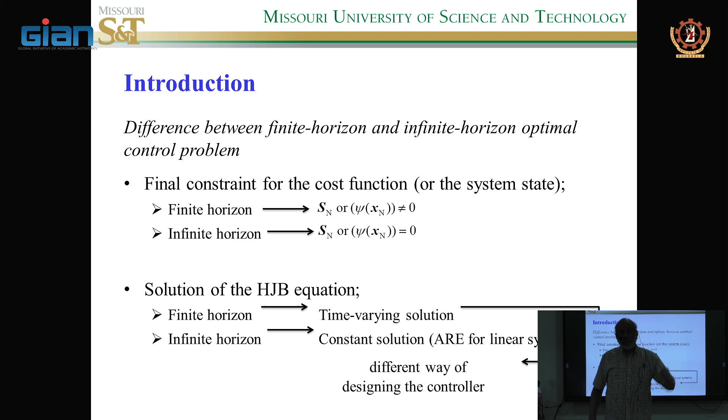Now the only reason we don't deal with this for tracking - I didn't talk about tracking - but the reason we don't deal with that is because in function approximation, when you're using neural networks for instance, you have a problem because you have to have it on a compact set. And so when time is infinity, it doesn't stay on the compact set. So when you have a time-dependent trajectory, typically a trajectory tracking problem is explicitly a function of time. And so there's a lot of discussion - even though simulations work, mathematically it is not correct to have tracking. Here is regulation, but you can do the same thing on tracking.

And if you do that, then you have the time, and therefore neural network approximation mathematically is not correct, although it works pretty good. Whereas for finite horizon, the actual activation functions will be an explicit function of time - I'm going to show you that, don't pay attention to that. And that's okay, because it's finite, since it's finite time, n is finite, okay? So it is okay to have that on a compact set. But for infinite horizon, this is a problem. So normally, there's a way to do it - we take the augmented system approach.

That's also similar to what I presented. Okay, so the solution to the HJB equation, you see that for finite horizon is time varying, and for infinite horizon it becomes a very standard algebraic Riccati equation.

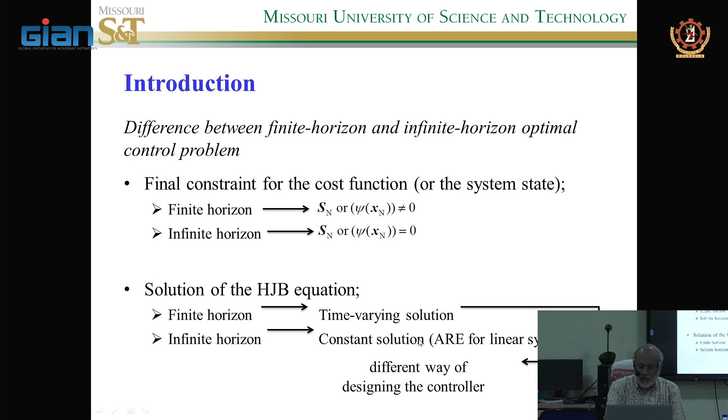So here I'm going to go back again to the LQR problem, the linear quadratic regulator problem, where this is a discrete time system. In this case, A and B are constant. It doesn't matter, A and B can be time varying; you get the same set of equations. So you see that we are defining an index. This term is called terminal constraint. You see that? And S_N is the terminal weighting matrix, which is up to the designer.

You choose that. And here you see the second term, i equal to k to N minus 1, this term is called cost to go. The cost that goes from k to N minus 1. And it is always quadratic. You can pick non-quadratic functions; there are benefits to that. But for you guys right now, we are assuming this is quadratic, okay?

So if it's quadratic, there is a quadratic term in terms of state, and a quadratic term in terms of control input, because you want to minimize the error in the state as well as the control input. That's what you normally try to do, right? So we talked about the derivations earlier. You end up in a Riccati equation because you have to solve for S of k. And that S of k goes in the control policy, and you see that K_k is a function of S of k plus 1, A and B.

So S of k plus 1 comes from the Riccati equation. Now, remember I said the Riccati equation you solve backward in time. Look at that, S of k is a function of S of k plus 1. So that's why you start with S of N. S of N is already given here, that is the terminal constraint. S of N is given, and then you come backwards: S of N minus 1, S of N minus 2, and S of k. That's how you go backwards from the equation.

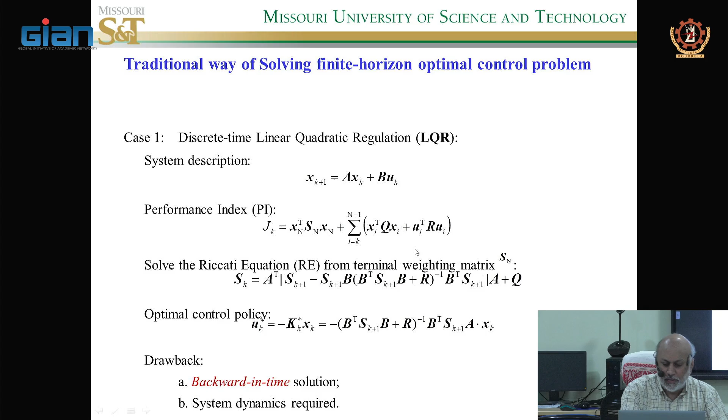And typically there's no closed form solution; for Riccati you may find it under some conditions. So basically it's a challenge, okay? It's a quadratic equation, and you can use numerical methods. But the problem here is it's backward in time, as we talked about. So if it's a nonlinear system, where f and g are nonlinear and smooth, then the same idea.

You have a performance index, and the performance index has a terminal state constraint given by psi, plus this r is the cost to go. And we use a recursive Bellman equation, V star of x_k. You see this V star is an explicit function of k. Remember, this is what I was talking about. Why is it an explicit function of k? Because this is a finite horizon. For finite horizon, the value function becomes an explicit function of time, just like the Kalman gain becomes time varying.

Okay? So now you write this as k to k plus 1 and then k plus 1 to N minus 1. So the optimal control policy not only requires the g dynamics, but partial V star over partial x of k plus 1. Now typically V star is unknown. That's why we use a neural network. And what is that neural network that approximates the value function called? That is called the critic. The critic approximates the cost function.

So there's another neural network we use to approximate the control input because you don't have g. And that neural network is called what? Actor, because it generates an action, which is a control policy. Okay? So you cannot forget that.

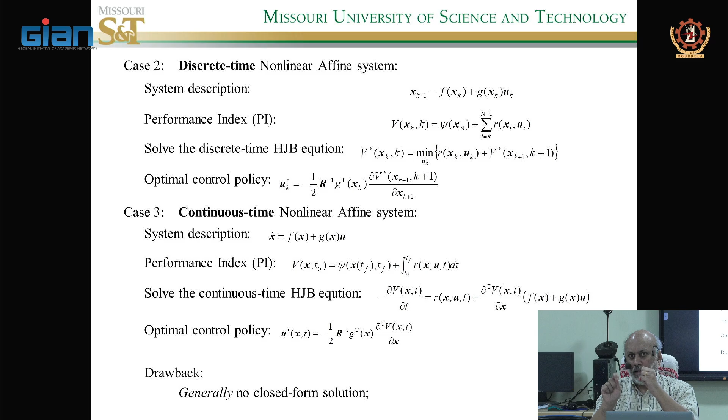So what they do, remember I said, between any sampling interval you hold the time, and then you use numerical methods to solve that HJB equation. Okay? And again, how many iterations you need is also not known. You see what I'm saying?

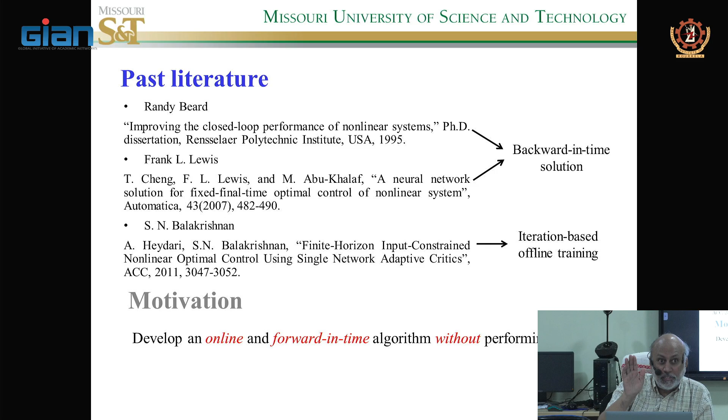So that's the problem, you need to remember that. And there are some references, I talked about it. But the goal was online and forward in time. I think that was the goal. Because otherwise we cannot implement backward in time optimal control in any of the applications, even if you know the system dynamics.

So this is the same thing that we talked about in discrete time earlier, I showed you. So the Q-learning essentially relaxes that problem. Two things it relaxes. One is the backward in time, and what is the other thing it relaxes? A and B, that is correct. You don't require A and B. So you cannot forget that. This is with or without the network.

Remember that. We do this and then we are applying the same idea. So it's no big deal once you understand this. Remember, that's why I'm going through it, because we're going to talk about the quantization at 11 o'clock. So I want you to understand this reinforcement learning stuff. And I'll also show you some history stuff.

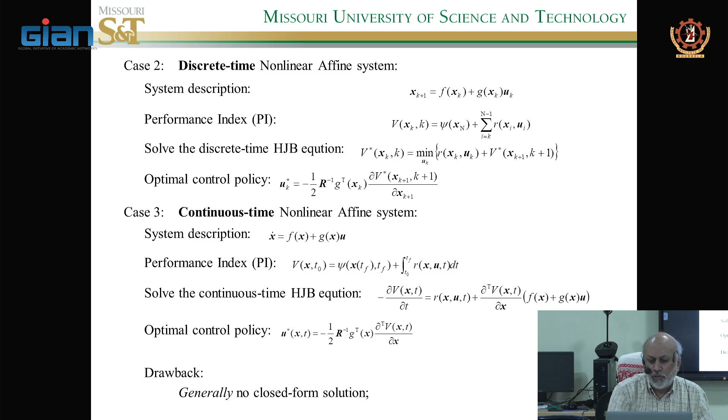So the way it works is you define J of k plus 1 is equal to this. You remember that the Bellman equation is a recursive equation. So you use this equation, this V star of x of k plus 1. The V star of x of k plus 1 is basically the J star of k plus 1, which comes out here. See that? So it's very critical. In some slides I have the details. So you see this part is basically that.

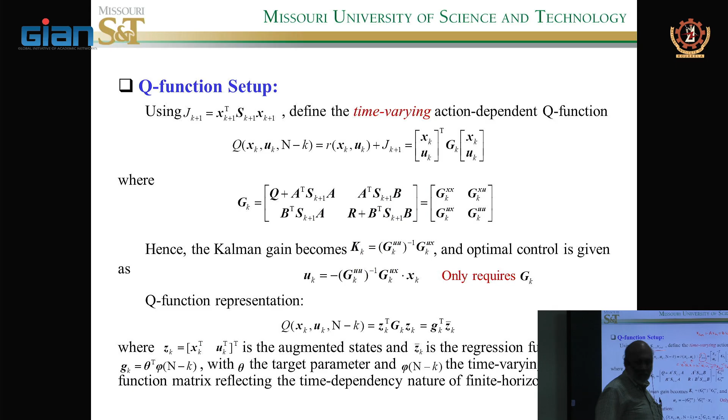So this equation becomes x Q x plus u R u, plus x of k plus 1 transpose S of k plus 1 times x of k plus 1. So now what is x of k plus 1? It is equal to A times x of k plus B times u of k, from the system dynamics. Right? That's what we did here. Oh, I think it doesn't change here.

So what you do is, wherever there is x of k plus 1 transpose, you put A times x of k plus B times u of k transpose times S of k plus 1 multiplied by A times x of k plus B times u of k. Now you see that there are terms with x of k and u of k. So you combine that and write it in the form of xk, uk, you pull it out, and then you have a matrix. This matrix is G of k, and then you have x of k, u of k. And that's how we got that matrix. It's not difficult at all.

Any questions here? Because we keep using that if it's a linear system, linear networked control systems and so forth. It's not that hard. So once you have it, now look at that. You really need this term. We don't need this whole matrix, but you need that term. Inverse of that, multiply by that. And that's nothing but your K of k, your gain.

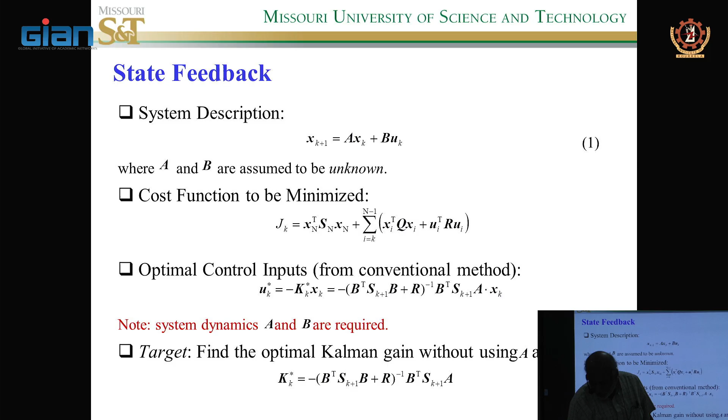Okay? And that becomes an adaptive control problem. All right? Okay. So here is the inverse. Remember I said, here is the inverse times that. Okay? All right. So that's for linear systems. So that's called Q learning. So Q learning, you relax A and B, and it does work. Okay. So let's see here.

Now, professor asked me the history, right? I'm going to show you this. So here, now you see this history stuff. So what you do, you have this N minus k minus 1, and you get that in the basis function, and you get this. So now look at that, the Bellman error, this is what I want to show you, is given by this expression Q hat at k plus 1.

So this term is the difference in the time with the cost to go. So therefore the error in reinforcement learning. So this is where you use adaptive dynamic programming. So that is where you're bringing in the adaptive dynamic programming, which is the reinforcement learning concepts, into this. Okay? Now look at that. There is also a terminal constraint error because it's a finite horizon.

Now look at the update law. This update law basically tries to solve it by minimizing the square of the Bellman error and the terminal constraint error. Okay? So now this is where the professor was asking. Look at that. You see this? That's the history.

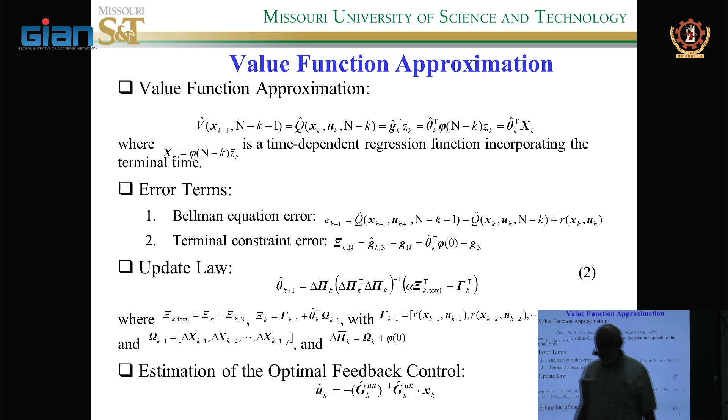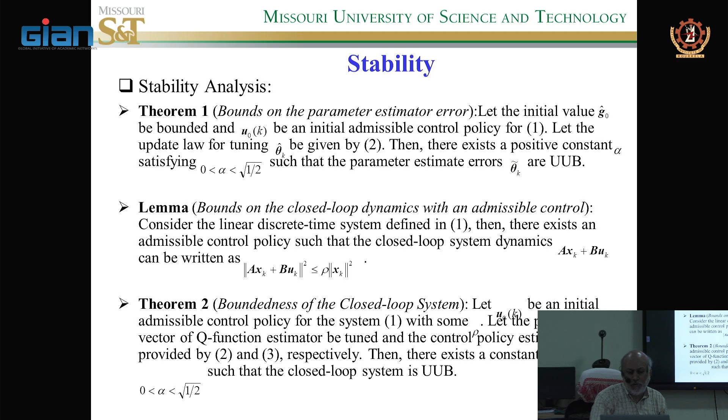Any questions, guys, here? So this is the idea for linear and nonlinear systems, and so here are the proofs that normally we talk about. Okay, I didn't go through it, but you guys can go through it. And we talked about the output feedback as well last time.

Okay, so now remember those update laws here, the adaptive observer, those are developed as part of the PhD work. And remember I said, how do we derive those? Using Lyapunov. Most of the students that work with me spend probably 9 months out of the 12 months doing that, and 1 month just getting the results, and 1 month basically coming up with a solution. So most of the time we spend is on the proof, and that takes an enormous amount of time.

Now, is there any better way? No. For all people who are doing research, the main challenge is in the mathematical equations. That's why I told you simulations work, but we want to ensure that theoretically there is a guarantee. Otherwise, in control theory, you can't publish a paper. Okay, any questions, guys?

So now, in the update laws, you see, the update laws are driven by the Bellman error. See, this is the output error for the observer. This is the Bellman error. So that's what the Bellman error is, the measured quantity. So we are using that to drive the update law. It's used to tune, and you learn the G hat, and over time the G hat will be pushed to G. And when it gets pushed, the Bellman error keeps going down to 0. Remember, that's what those plots are.

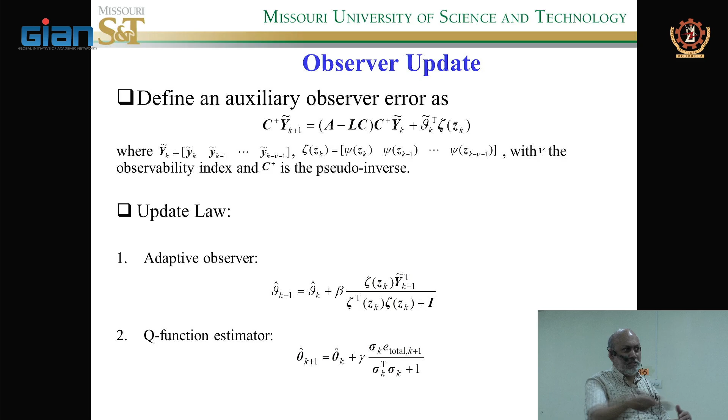Okay, so I'm just saying that a lot of times students don't realize it, because nobody tells us at that time. But when you're doing PhD or MTech, you guys get paid less, or some of you probably not, I don't know, GATE usually pays some money, right? But how much do they pay in GATE? 9,000? Huh? 12,400. That's not much, right? A BTech guy who gets a job is making more. But that's only temporary for 2 years, remember that. That's what I'm trying to tell you.

The same thing when somebody is doing PhD, the MTech person would be making more, right? But that's only temporary. But the minute you get onto it, you will be far ahead. You will be far ahead of the person who just goes with the bachelor's. Okay?

Yeah. But remember, while what I'm saying is true, PhD is not for everyone. Don't forget that. In other words, you don't want to join a PhD if you don't have the inclination to work hard. And you'll probably have sleepless nights many times because things don't work in the mathematics. Remember I told you that things won't work. And that's why I said, out of 12 months, 9 months we spend on the mathematics because it doesn't always work, until you get up in the night and you find an answer. Okay? So that's where it's no pain, no gain.

This has nothing to do with machine learning, but right now pretty much every company is expecting machine learning. Whatever I talk to you, the temporal difference error, all that is machine learning. We are applying this for control. And you see that data, I kind of skipped. All that comes in as part of that, how much data you pick, what type of data. I just told you, you use the temporal difference error, but that's how you select that.

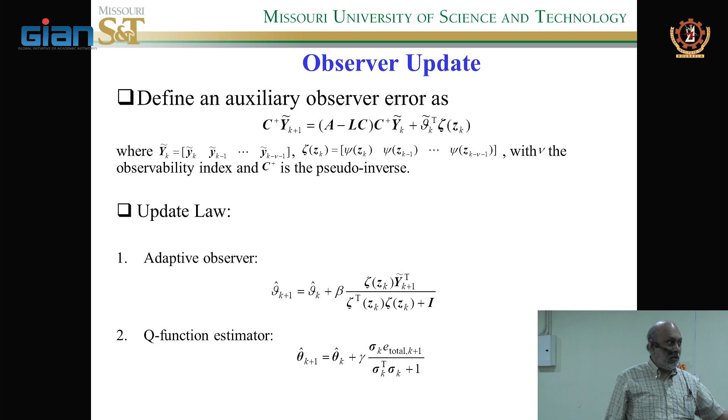Learn how to do a little coding, not just MATLAB, C code or C++ or Python. Now Python is wide, so many know Python. Most of you know it, there's only one hand that doesn't. Learn Python. Any other questions, guys? This is my 5-minute advice. This is fact, there's no bullshit in here.

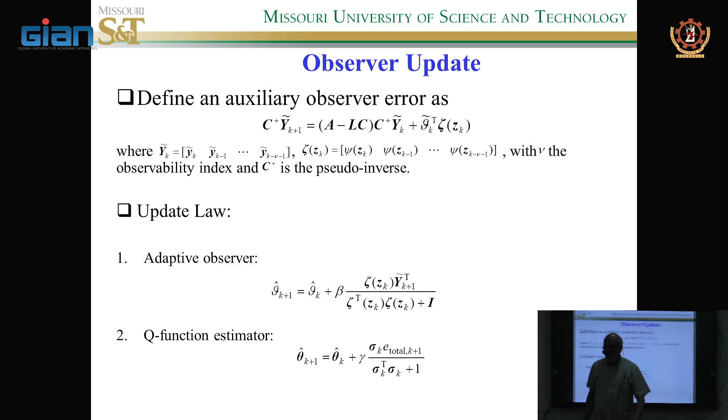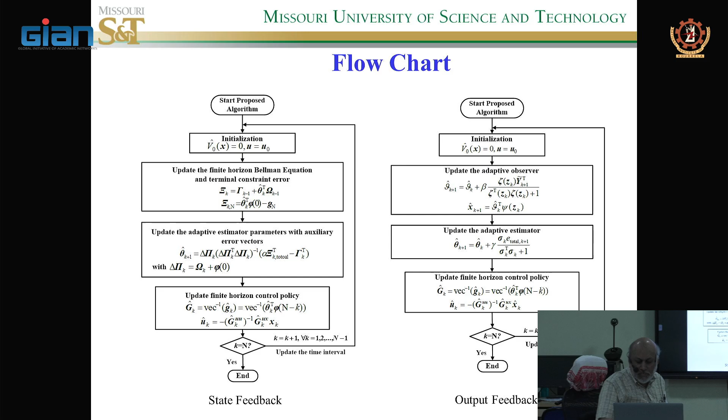Let's go back. So observer updates, we looked at it, and there are two flow charts with the same idea. This is the state feedback, this is the output feedback. We do the same thing for nonlinear systems, and I showed you all that, so I'm going to skip here. Any questions here, guys? This is what we covered yesterday, so I just went through it quickly.

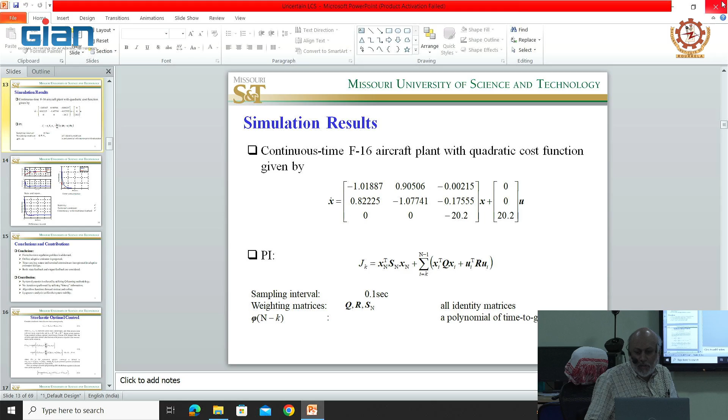What I wanted to cover today is quantization. We use the same concepts, Q-learning and neural networks, so we are going to go into the quantization. This is the quantization side of it. Every control system has this problem, quantization. I know we talked briefly about it in the first class. So why do we need to look at quantized systems? Why is that important? Where do these quantization problems come in?

Even without the network control system. Let's say you are implementing a controller for a practical system. So where do the quantization problems come in? The controller is embedded, so it's in the digital domain, but all the actual system is in the continuous domain. So where does quantization come in? ADC. Yeah, ADC.

You always use either the A to D converter or D to A. Like she said, the controller is in the discrete domain, the system runs in continuous. So basically you need some sort of interface, A to D, from the sensor back to the controller, and D to A to convert the digital value into continuous so that it has a hold between sampling instants, keeping the same value. That's all it is. So this problem occurs even without a network.

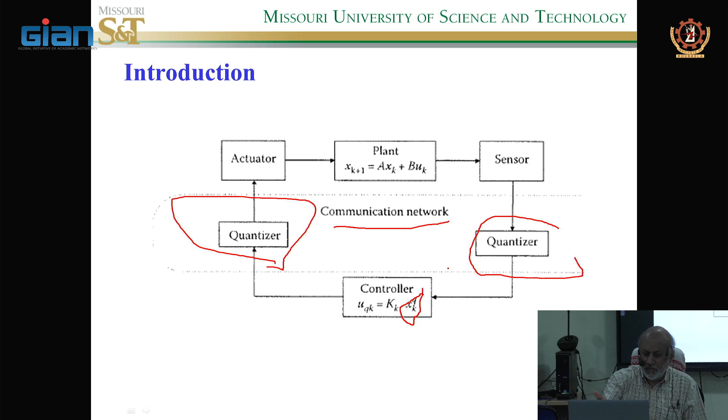So here is a linear system. You have a network, and the controller uses the quantizer. So therefore the UQ—we used to say UK, but here it's showing as UQ.

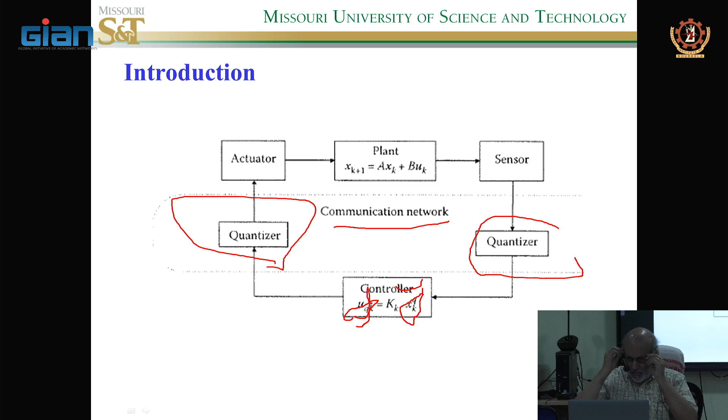Quantization effect is inevitable in computer-based control. That's why I told you, even if you don't have a network, you're going to face this problem. Quantizer model plays a role in the control design, but a lot of times we don't spend time on them. So there are quantizers called static quantizers—that's what we normally use—where the step size is fixed.

Now I'm going to talk about a dynamic quantizer, which was developed in early 2000, where the step size varies over time, and there are benefits to that. I gave you some literature—you can see that the dynamic quantizer was originally done by Liberzon. He's a faculty member at Urbana-Champaign, and got his PhD from Yale.

As early as 1990, they developed what they call a static quantizer, and showed how a linear system is stabilized with quantized state feedback. But the dynamic quantizer was done with nonlinear control ideas, assuming the dynamics are known. So what I'm going to present is what happens when you take it to the unknown case, when the dynamics are unknown. That is the difference.

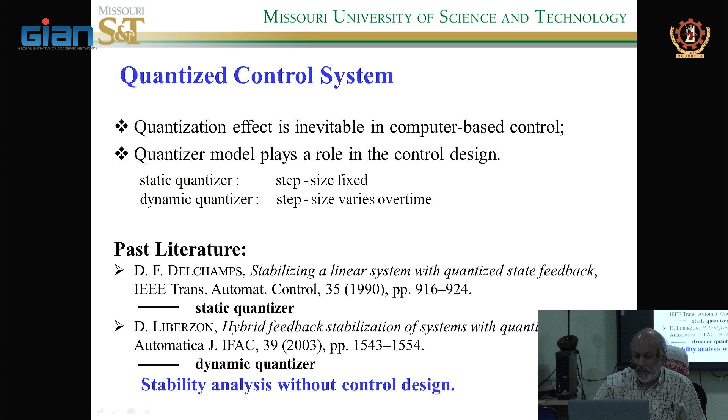So here there is stability analysis but no control design. Here is the background: you have the controller UQ, with unknown A and B, here is the terminal cost, here is the cost to go, and two quantizers—one for the system state and the other for the control. Control input based on the quantized state, that is UQK equals KK times XKQ. Remember in all these chapters before we used XK, but here we are now talking about a quantized value.

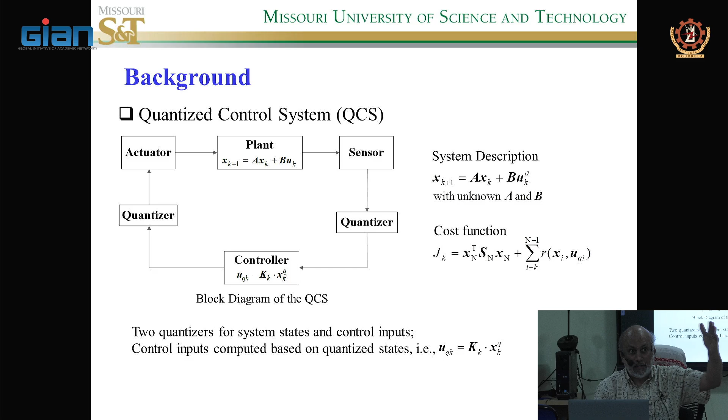So what I'm going to do is assume that the network has no losses, but I'm going to use the quantized value, with no losses. Remember, these are different aspects—packet losses and delays we already talked about. You can still have a stochastic version because you can still add noise and make it stochastic; otherwise it becomes deterministic. The book actually talks about this. One of my students did the quantized system deterministically, whereas in the book we converted it into stochastic, because in the original work with the student we assumed the network is lossless, without delay. Whereas in the book we converted that into expected value, that is with loss. You can do both.

Any questions here, guys? What about quantization? Okay, it's 11 o'clock, we're going to stop, right?

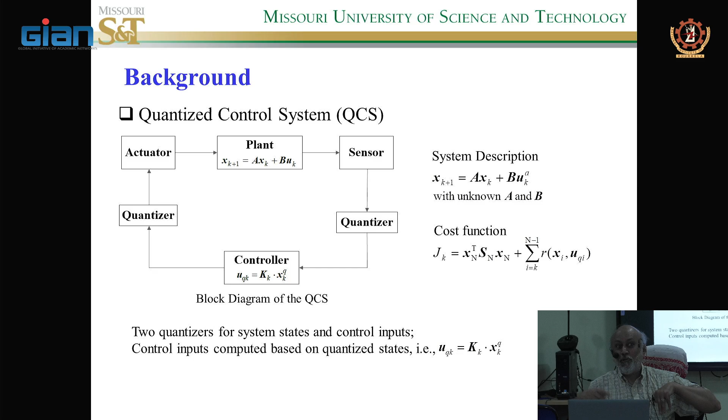We have tea—very good, very important. So how many of you watched the match yesterday? Yeah, that's a big deal, right? There's more to celebrate, maybe that's the tea. All right guys, we'll see you in 5 minutes. Okay, bye.